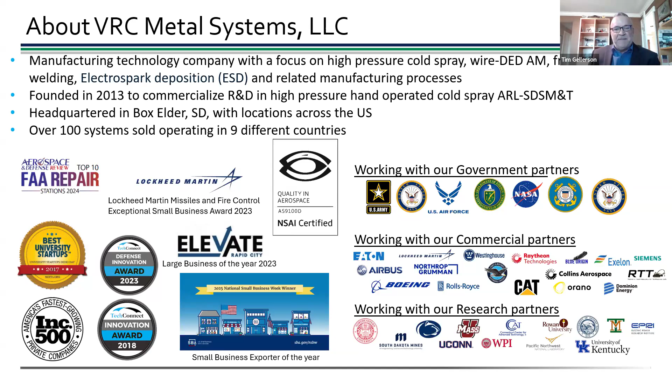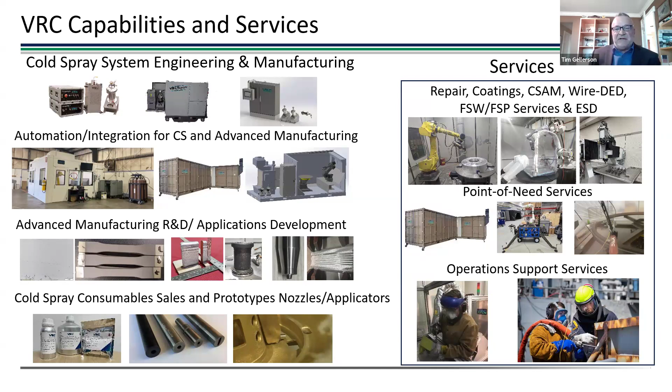On the services side, the far right, we do repair, coatings, cold spray out of manufacturing, wire DED, friction stir welding like I told you about before, friction stir processes and services, and electrospark deposition. If you look at the slide on the far right again, you'll see that the point of need services, we offer everything across the board. We offer not only stand up 100% turnkey, ready to go applications within the company itself, but we also offer the portable needs and services out there to the market as well.

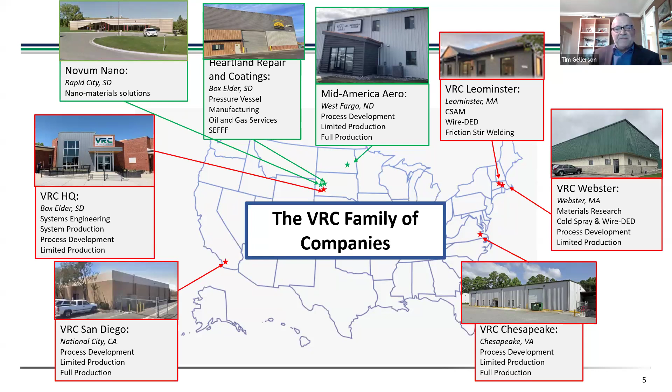So I'll get into a little detail on each of those I just provided earlier. The VRC repair production sites - we consider these our maritime centers of excellence, and that is our Norfolk, Virginia facility and our San Diego, California facility. We are certified by the Navy for quality procedures for parts repair per the UIPI, the Uniform Industrial Process Instruction, I believe 6320-901.

So we do cold spray repair capacity mostly in these two facilities for the DoD, and we also do commercial sectors as well. Some of those commercial sectors we're concentrating on or doing work with are BAE, MHI, Colonna's Shipyard, East Coast Valve, EMC. The list goes on and on of the people we're supporting within the commercial sectors, mostly focused on the maritime industry.

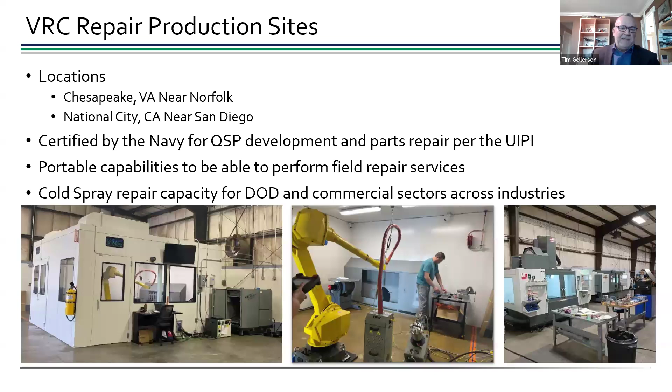This is Mid-America Aerotech, the facility out of Fargo, North Dakota. This is our Aerospace Center of Excellence. They do complete manufacturing, assembly, test and return to service of hydraulic and pneumatic components. These are complete LRUs, line replaceable units. They go directly back on an aircraft, certified to fly, and can go out the door.

We also do cold spray process development, qualification, and repair. We also do ESD there - electrospark deposition, development and qualification. Matter of fact, we do have aircraft out there now using ESD as a way forward of fixing product that are flying across the Pacific Northwest right now.

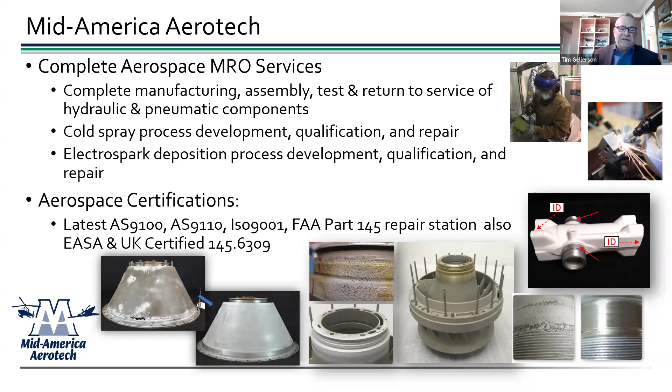This is Heartland Repair and Coatings in South Dakota. I mentioned them earlier. This is our Welding and Fab Center of Excellence. They are complete fabrication services, mostly concentrating on pressure vessels, some separators, catchers. They also do structural fabrication, mostly skids, spreader bars, and stands. And they also do piping fabrication as well.

In the cold spray realm within Heartland Repair Coatings, what they offer is for oil and gas heavy industry is a patented repair, pipe repair, including cold spray plus composite overwrap that we actually have the patent on now. They do other pipe and vessel coatings for corrosion and wear.

And I had mentioned earlier in the slide about SEFFF, a new company that came on board, and I want to explain how it ties back to Heartland Repair Coatings. SEFFF stands for Self-Expanding Firefighting Foam. It's an advanced self-contained firefighting foam system. No water needed - it can put out a fire without the need for water. It's patented in North and South America.

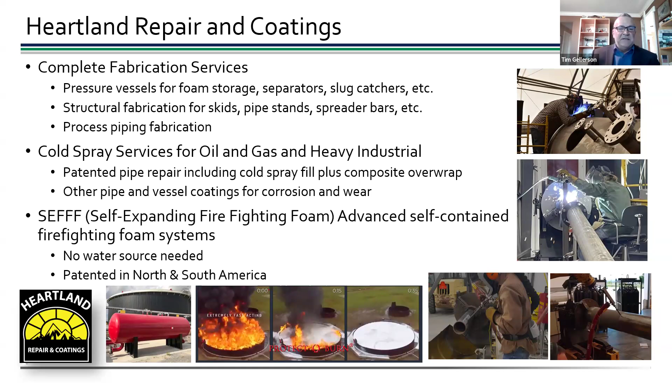Novum Nano - this is our nanomaterials research lab, also up there in South Dakota. They identify nanomaterials that can improve performance across the board, mostly on common engineering materials. They have functionalizing nanomaterials for improved homogenization.

One thing we got to keep in mind is, think of it in terms of reduced particle means better distribution - that's what this means and what they look for. So in materials development and production, a lot of things they are concentrating on today are lubricating oils, greases, thermal grease, rain erosion coatings, all those different things that we normally use in normal industrial settings.

Prior work of this company, we have a SBIR Phase II - looks like 3 of them that we're working on now: one for conductive grease for avionics, rain erosion coatings, composites, and lubricity for engine oil for fuel efficiency.

And the current work we're doing right now is another similar project, phase 2, development of a super oleophobic floor coating system for hangar floors that we're putting in play. We're also working with race teams to evaluate engine and gear oils and lubricating greases. And we're also working with trucking companies to evaluate engine oils for fleet fuel efficiency. So we're into all those things currently.

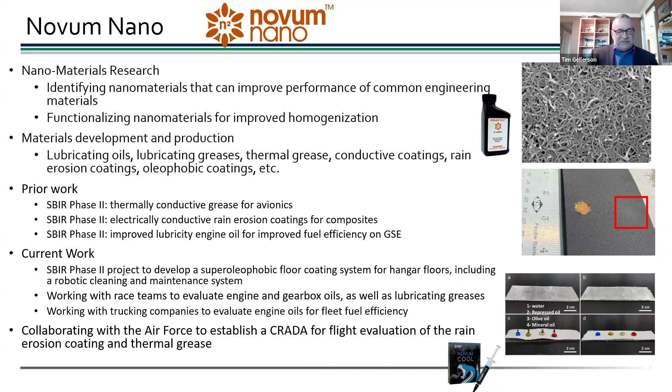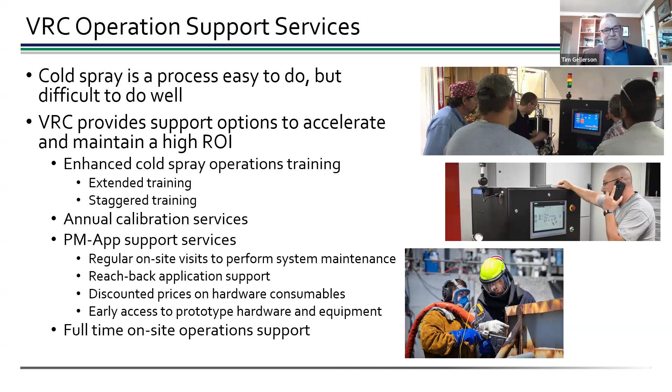Thanks, Aaron. All right, well, thank you, Tim. Now you guys get to look at my ugly mug.

All right, so I'm going to talk technology now, and I am going to focus on cold spray primarily, but I do want to introduce a couple of other technologies that VRC is investing a lot of time in developing also.

Cold spray - I think most of you are probably familiar with it, but for those new to the game, we're spraying powdered materials, and the plastic deformation of those materials, the shock wave that occurs when the powder hits the substrate, all plays into how those particles bond to the substrate and then to successive layers. We do this with a lot of different materials. As VRC, we primarily focus on high pressure cold spray, generally in the pressure ranges and temperature ranges you see here. So that's kind of our focus.

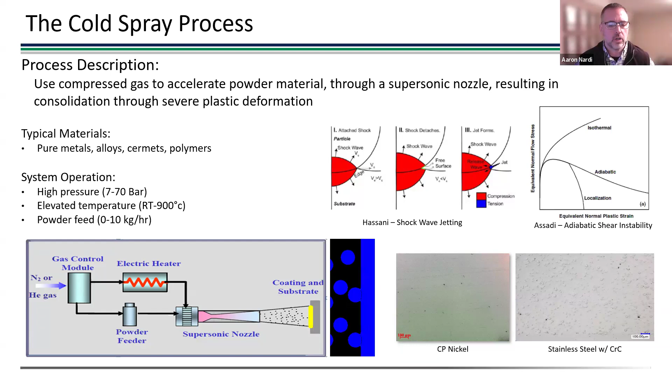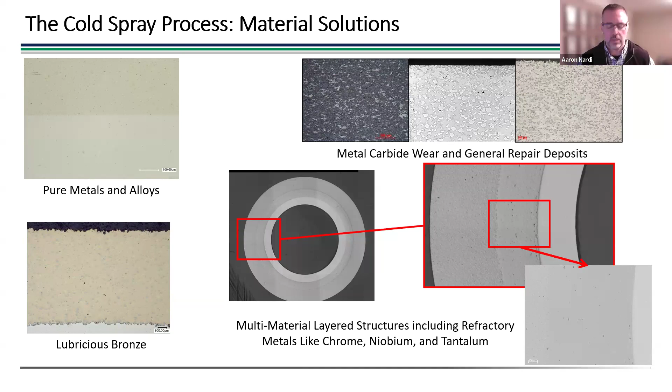When we do that, we look at a wide variety of materials. The nice thing about cold spray is you can spray pure metals and alloys with good quality and good mechanical properties. You can also mix materials, and you'll see a lot more of that in the industry in general - you can get some really unique benefits by mixing these materials in the solid state. Also layered approaches where you do multiple layers, and even grading of materials from one to the other. So there's a lot you can play around with on the metallurgical side of things, and you can get some pretty unique properties.

Tim mentioned friction stir - this is a technology we actually procured production equipment as well as personnel to do, and we're actually doing commercial operations in friction stir welding and processing of materials today. This has been a new development over the past year, and we see a lot of synergy with this process and with cold spray. So there's a lot of benefits of combining technologies, and you'll see a little bit of that.

And that's where that similarity to cold spray comes in. Now, what's really unique is you get this super fine grain structure, and you can also process materials that aren't being welded together—you're just running the friction stir tool through it to enhance properties like ductility.

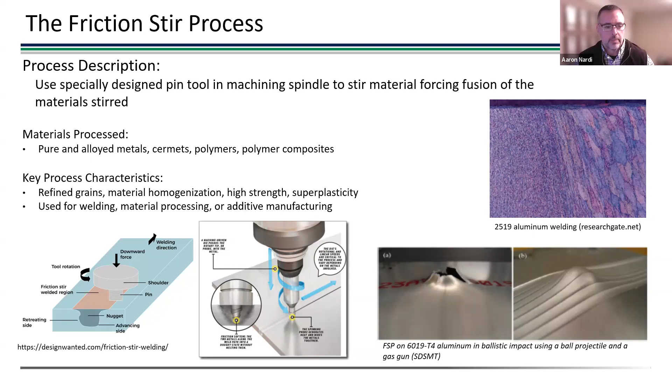So what you can do with this, and there's a lot of standard production processes now—this is what we're actually doing commercially at this point—is welding of parts together.

The second machine we have is actually a 5-axis machine. So this is 3-axis; we have a 5-axis machine as well, so you could do much more complicated parts and much higher loads. This machine can do a quarter inch, half inch of aluminum without too much difficulty. When you get much past that, you switch over to the higher load machine to do that work.

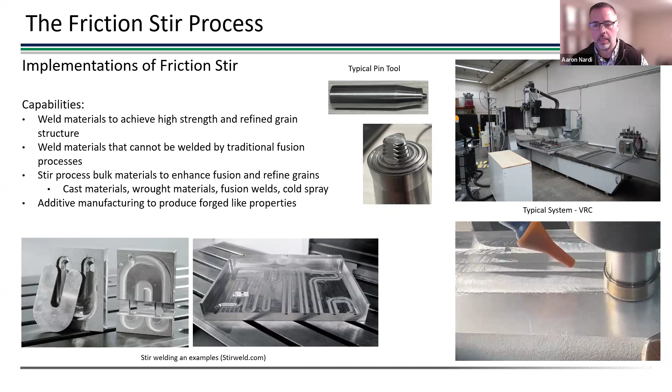The main difference here is in the gas metal arc process, you're using the wire short circuit against the substrate to create your arc. Then as that wire feeds, you continually create that arc, and you're melting the material and so forth.

There's certain characteristics of that process, but there's also certain limitations with what you can do with it. Like, for instance, you always have to have filler metal—you can't weld a material without filler metal, just melting the two materials together.

Now, the plasma arc process is a little bit more like a TIG process, but instead of having the arc between your electrode and your substrate, you're actually creating this plasma jet with the arc, and that plasma jet, kind of like a laser, hits the substrate and heats it up, and then you feed a wire, a filler metal, into that arc. So we use both processes.

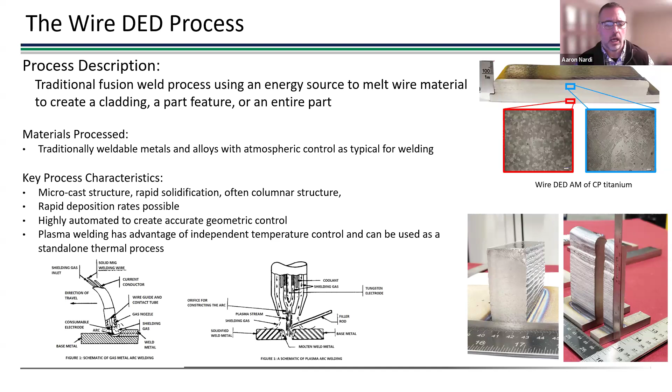Here's a few examples of what we're doing with it. So we're building parts, making parts additively. That really was our focus when we started working with this process.

And in some cases, you're doing that in an inert area. Like if you're doing titanium, you want to really control that atmosphere. Other materials are a little less sensitive, steels and so forth—the shield gases are enough to protect those.

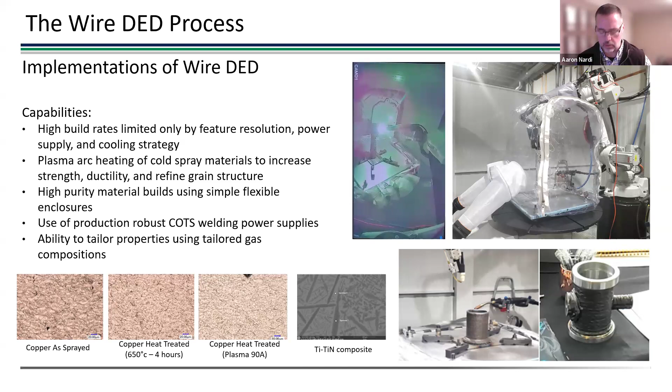material, providing wear resistance, and so forth. So with that, I'm going to jump back to cold spray and talk about some of the challenges and some of the solutions that we've been working on for a variety of cold spray processes.

So I guess one of the things to talk about is masking. Now, this seems like a fairly simple thing to do. You put a piece of sheet metal in front of your part and you stop the material from sticking where you don't want it, right? And that's really basically what we do. But there's a lot of little nuances to it.

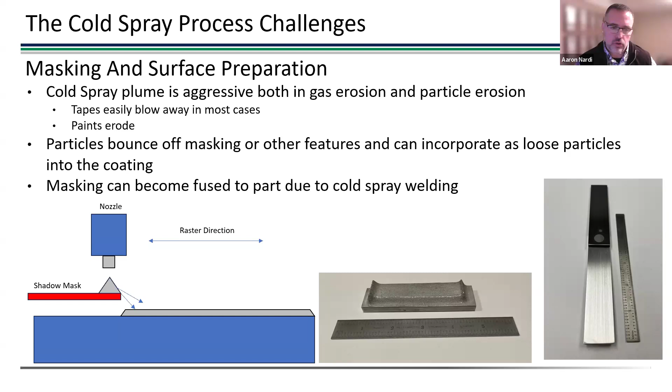So the last image there on the right is an example of where we're purposely doing that. We have a steel piece of sheet metal and an aluminum piece of sheet metal, and we've created an overlap joint, and then we've welded the two together with cold spray. In this case, it was purposely done. We wanted a good bond joint, but you can kind of see that this process not only can be used for coating and additive like we're all doing, but it also does secure materials together. Not exactly the same way as fusion welding, but it does do the job.

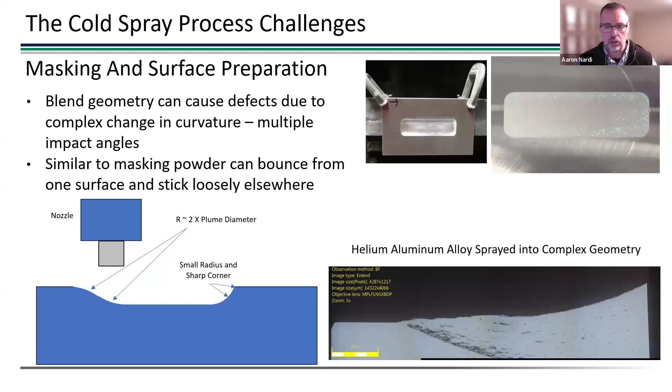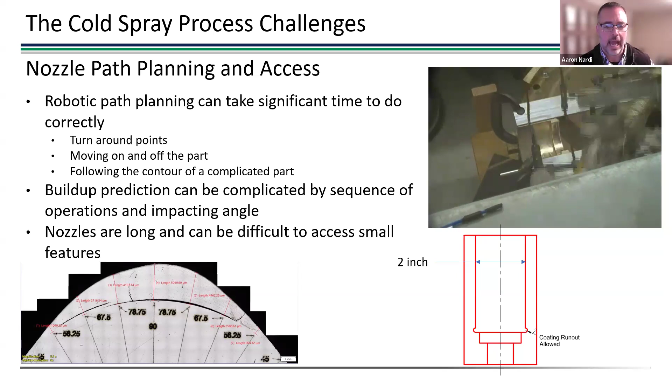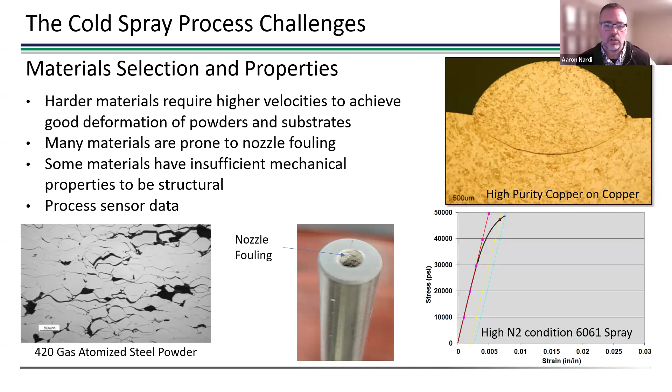You can also see a couple other examples. One issue we run into is nozzle fouling, that's the middle image, which happens when you get a material that's really soft or has a lot of fines in it - there are many reasons for nozzle fouling, but it's a pervasive issue most everybody runs into at one time or another with cold spray. And then you've got your basic structural properties - how much ductility do you have in the material you're depositing?

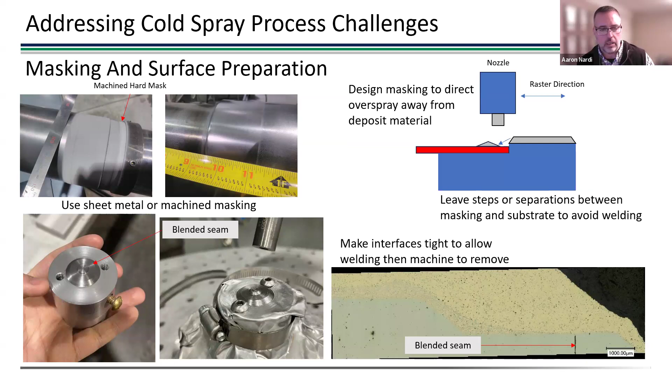As far as blending goes, very large, gentle blends are the best.

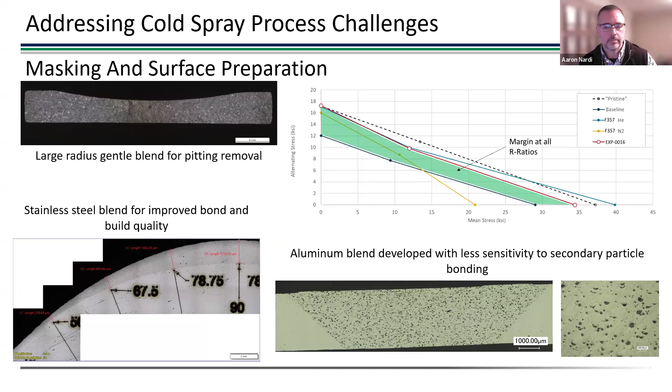As far as path planning, there's a few things that are being done. The first is what you're probably familiar with, CSAM software, additive manufacturing software. There's several ways to create geometries and path plan all virtually, then go onto your robot and make your part or whatever.

There's also repair strategies, right? So there's obviously creating custom programs and so forth, but that takes a lot of time. There's also scan to plan type of technologies that are being developed, and we're actually working with a couple of universities as well as other suppliers, looking at a few of these technologies to be able to be used in shop environments or even in expeditionary use out in the field.

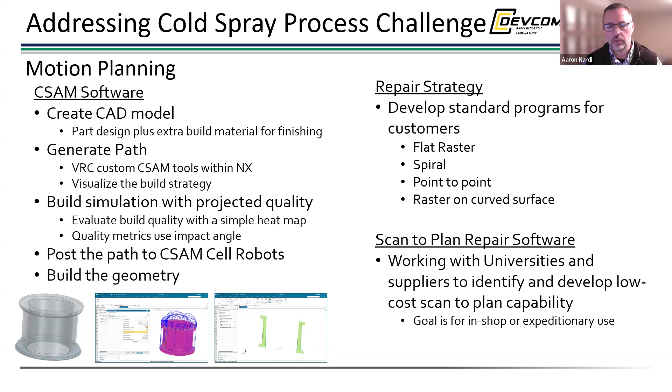Nozzle access: we've done a lot of work recently on new ID nozzle geometries to be able to get into diameters as small as 1.5 inches, and also be able to get very uniform depositions with those materials. Traditionally, when you start turning a corner with the cold spray material, you can end up with all of your powder on one side of your nozzle, for instance. You still can get a good deposit, but in certain cases that can cause you problems and irregular wear of your nozzle.

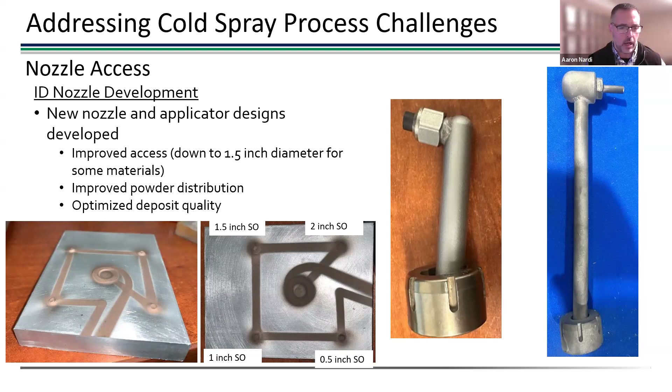These two new designs are based on a couple different concepts of eliminating that, and you can actually see from these patterns that have been created that we're actually getting a nice ring pattern of your powder. It's uniformly distributed within your nozzle now, so you get more uniform wear and erosion as well as a better build.

There's a lot that's been done over the years with powder processing. You'll probably hear a lot more from Solvus on that at CSAT. We're doing a lot of work with a variety of different powders, looking at processing of those materials in different ways to get better quality. That's sizing, that's heat treating, that's a variety of other things that can be done to those powders.

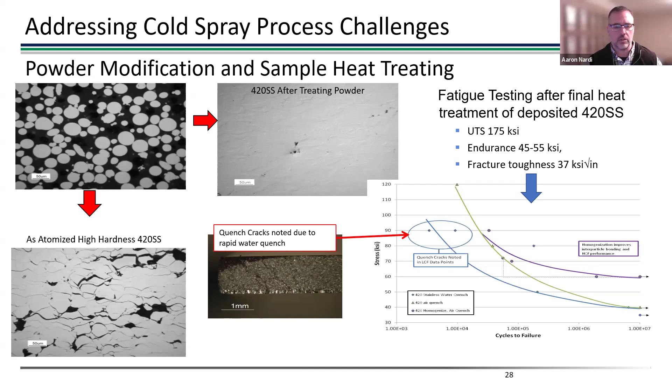And then when you do it right and you start to look at additive manufacturing, you can get some really fantastic properties. This is just showing some fatigue properties of 420 stainless steel, but you'll actually see some more properties from materials in my CSAT presentation with Inconels and other aluminums and so forth.

These are just a variety of different materials that have been developed over the years. Again, I mentioned before, these blends are very unique to cold spray because nothing that you put through the gun is going to melt. So it all ends up in your deposit in that solid state, in the same state that you put it in the powder feeder.

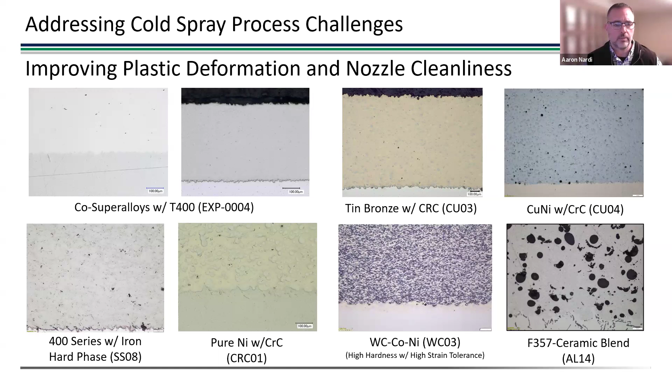And these are similar to what I showed a couple slides ago. And then, of course, you've got your pure metals and alloys with no secondary phases, and there's too many to list them all. Here's just a quick snapshot of a few key materials that have been challenges in the industry in the past, that we've had a lot of success with powder processing and sizing, making sure we get the input to the process just right.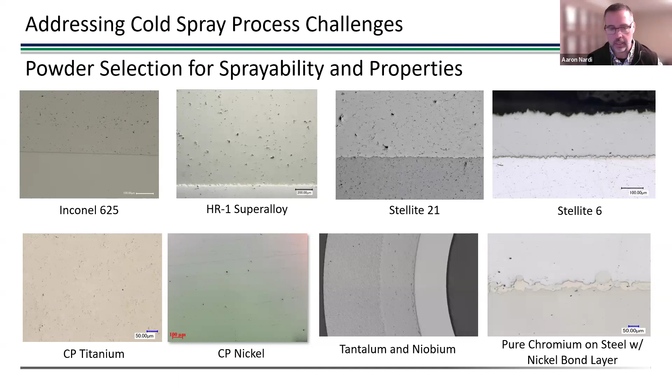One of the last things I'll leave you with is thermal processing. We know we can take a cold spray material and anneal it, do a variety of different thermal processes to that deposit, and get some very nice mechanical properties out of it. I wanted to show this because it shows what even a very mild processing does for the material.

This is an austenitic-based stainless steel blend that uses chrome carbide as a secondary phase. That secondary phase helps eliminate nozzle fouling, and it also helps consolidate that material really well and gives you some wear resistance.

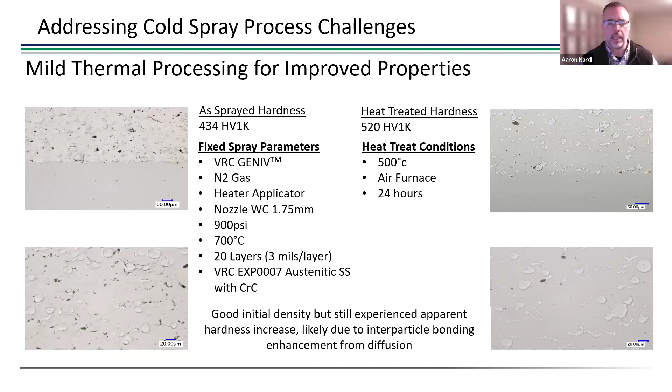The right-hand side of this image is actually after a very mild heat treatment — only 500 C, which for austenitic stainless steel is still pretty low, but a long time in the furnace, 24 hours. This is what you might expect if you put this material into service at these temperatures, and you actually see a hardening response, going from 430 Vickers up to 520. That's a bit of diffusion going on between that secondary hard phase, which strengthens the deposit a little in that final condition.

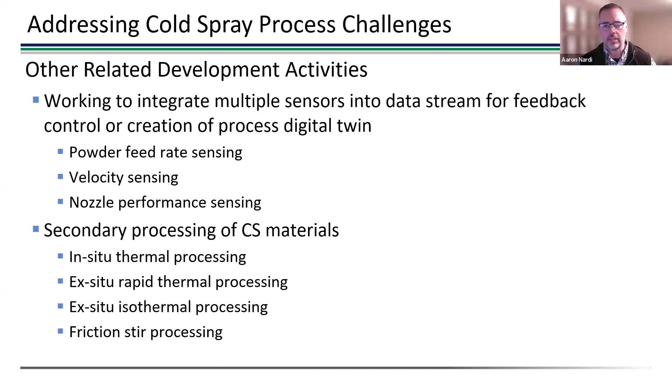And this is where I'll end, just a few last ideas. Sensors — a lot of work with sensors, whether it's powder feed rate sensing, velocity, or nozzle performance; there's a lot of work being done in that area. And then secondary processing, so all the thermal processing, whether in situ or ex situ, and also friction stir processing of these materials. With that, if anybody's got questions for either myself or Tim, happy to answer them.

All right, well thank you very much, Aaron. We can hop right into these right now. Got one right here — for repair via cold spray and similar technologies, what do you see as the needs to be met for their usage to expand, both in a technological and a regulatory sense?

So technologically, I think there's been so much done in the repair space, it's almost we're at what can't be done sort of thing. Your big hurdles are not technical, they're really in the regulatory space. And I'll let Tim answer that because he's very familiar with the regulatory space, especially for aerospace.

Sure. So regulatory is I would say one of our biggest hurdles, maybe I wouldn't call it a hurdle, it's more of what's required to get across the goal line. Is it a challenge? Sure, it's a challenge, but I think VRC's actually cracked the code on what's required when it comes to getting it approved by these governing entities — the FAA, of course, and then the ABS on the maritime side. We kind of have that figured out now, what they're looking for in terms of data, detail, and verbiage needed to support getting it approved faster than before. So it is still a challenge, but VRC has it figured out on how to proceed.